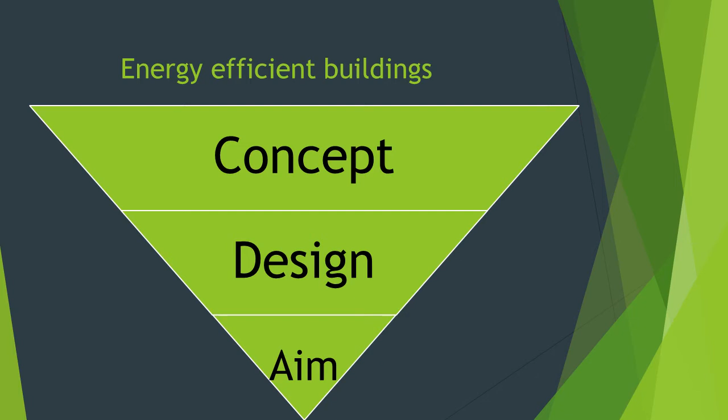So the objective of the energy efficient home has always been to promote energy efficient building design, to minimize the energy used, to come up with the design of a building, residential as well as non-residential, such that the building is able to manage its energy use on its own, depending upon the climate of the region and the solar radiation availability. It eventually becomes environmentally efficient and responsible towards the inhabitants as well as towards the external environment.

Now, understanding active solar and passive solar. There are two things which go into running an efficient energy home, and both work hand in hand. They run parallel in an energy efficient home. One is active solar. Active solar is simply when we install some module which converts the sun's energy into a usable form of energy, for example electricity, heat, cooling, etc.

Similarly, the other type of solar technology which we incorporate in an energy efficient home is passive solar. Passive solar is a very minuscule concept in the overall design or execution of the project, but the output we get from incorporating it is enormous, because the residential or non-residential house behaves smartly. We come up with a design which is smart in itself just by incorporating a small change, which we will take in the very next slide as we discuss passive solar for residential or non-residential houses.

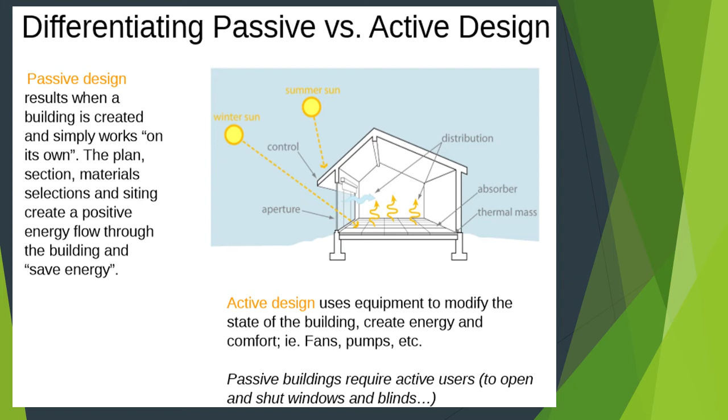So, before we learn about the solar passive design, we first understand the sun path chart, the trajectory of the sun or the behavior of the sun with respect to our planet. We are very much aware about the aphelion and the perihelion position of the Earth in its orbit with respect to the sun.

So we are very much aware about the winter solstice and the summer solstice. That we have shorter days in winter than in the summer, and longer nights in winter than in the summer also. So this thing is totally governed by the position of the planet in its orbit, and we are very much aware about the fact that we don't have constant duration of day and night hours throughout the year, and that goes on changing. Let me put it this way, the shortest day in winter and longest day in summer, which we often refer as December 21 or June 21, or winter solstice and summer solstice, respectively.

So, what does sun path chart give us an idea about? It gives us an idea about the amount of solar hours you are able to have in a particular day of the year. Second thing, one needs to understand the solar window, irrespective of the vegetative cover. If you are in an urban area, you have shades, you have adjacent buildings that may interfere in the solar window you will have. So for that reason, one may understand the amount of solar gain one has available.

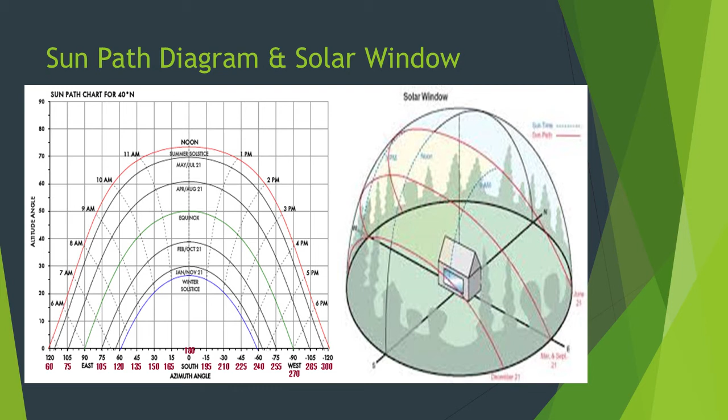Also, it helps us to understand that there are 2 days for which we have 12-hour duration day and night, which we often refer as equinox. These 2 days are March 21, the vernal equinox, and September 21, known as autumnal equinox. And why are we so peculiar about knowing these equinox days? Because these are the days when we manually determine the orientation of the south, because we are here in the northern region. So south is our solar gain direction, along which we are able to gain our solar radiations. So south is our vital direction, and for that reason we are able to determine the orientation manually. Also, it helps us to understand the amount of solar hours which we are able to have.

In addition to this, one more thing I'd like to put here is that a sun path chart also helps to understand the position of the sun. For example, we can see that the winter sun is at a relatively lower level than that of the summer sun, which also helps us to optimize the sunshade of a building on all the 4 directions of the building. And it also leads us to step ahead in terms of economizing the structure.

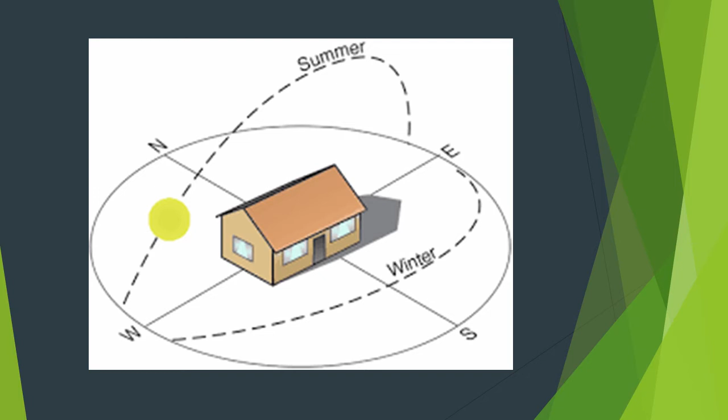Now, in this slide, we will be discussing solar passive design parameters, and we'll take all the design principles one by one. First thing which we'll have is shape. We are here in a temperate zone, and in this temperate region, the shape of a home is very important and plays a very important role in solar passive design. To determine a home's thermal performance, which is one of the important criteria we'll be talking about here, we prefer a roughly rectangular shape. Ideally it has to be cubical, but as we talk about the temperate zone, we want our homes to be roughly rectangular.

It should be elongated; the larger dimension should be along the east-west direction rather than along the north-south direction, because that is how we will be able to ensure better thermal efficiency of any structure, residential or non-residential.

By this thermal efficiency, we mean the finished floor area of the house to the sum of all its exterior surfaces, which gives us the floor area to surface area ratio. For any greenhouse structure, for any residential home structure, there should be a higher F to S ratio, which will ensure higher efficiency of the building.

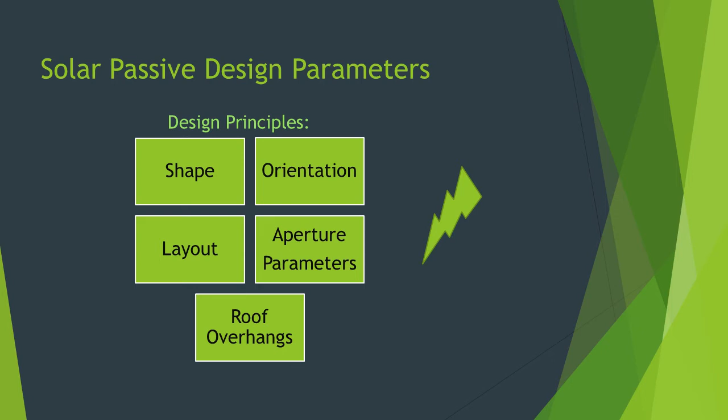The third criterion is layout. Layout is a very important criterion of the design principle of a solar passive house. By properly arranging the rooms internally, one can easily manage the heating or cooling that goes into the proper functioning of the house. For example, for any structure, we will put the sitting or living area along the south side for a person who lives in the northern hemisphere, above the equator.

So for that reason, we put the sitting or living area along the south direction, and we tend to have bathrooms along the west direction. Kitchens have a natural tendency to increase heat because cooking goes on there, and for an ethnic country like India, where we have lots of gatherings, the kitchen is a very important place. So we tend to put the kitchen along the north or northeast direction.

Breakfast corners often go along the east direction because of the morning sun, which is normally low on the horizon. So a proper internal arrangement of any structure helps us properly manage the internal heat.

By putting the living areas or the sitting areas along the south direction, we don't need much amount of energy to heat the area, as in winter the south facade will be able to trap the winter sun in, and will be able to heat the area on its own.

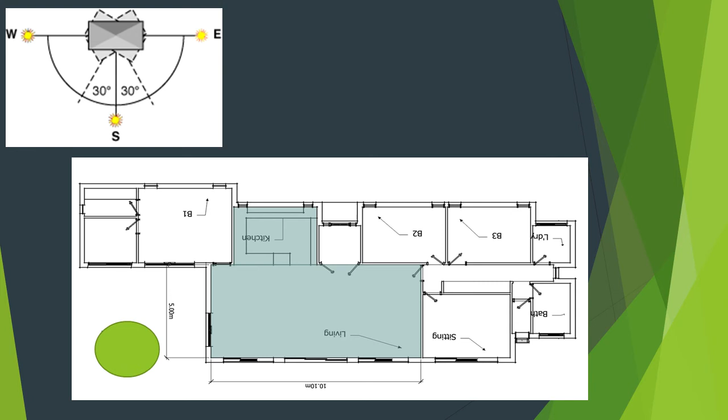So for that reason, we have taken care of the proper ventilation mechanism, or windows which will be in favor of having the infrared radiation during winter, but at the same time repelling it in summer. Also, we have visible transmittance. Visible transmittance value ranges from 0 to 1. For any energy efficient building, we want light and not infrared radiation, so our window should ensure a good amount of lighting and at the same time repel the infrared radiations. So this is the concept of high performance windows that goes into the solar passive design of residential or non-residential homes.

Now we have roof overhangs. Roof overhangs, awnings, sunshades, overhangs, call them whatever you want. The idea of roof overhangs in any solar passive design is to understand the position of the sun. The winter sun is going to be lower than the summer sun, and you will get an angle depending upon the position of the sun throughout the year, especially on the solstice days. So for that reason, you optimize the design of the sunshade, understanding the nature of the sun in the sky with respect to the amount of sunlight or infrared radiations or the visible light transmittance you need inside the building.

So numerous analyses are carried out in software that helps to support and design the solar passive house. We understand the position of the sun in the sky, and based on that an angle is devised. We go on and optimize the sunshade, the offset of the sunshade, the amount of overhang that is to be provided over the window, on all the sides. For example, this analysis is to be carried out for north, south, east, west, all four directions. Optimizing the sunshade helps us to economize our building, because we understand that you may or may not need the same overhang along all the sides of the building.

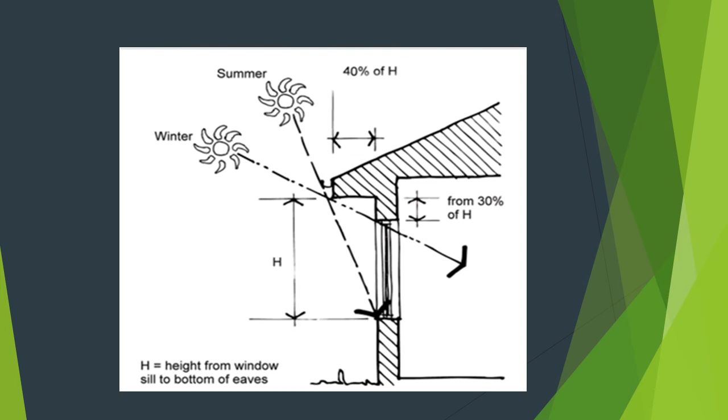Yes, you can use a sunshade to protect the windows from splashes of rain, but that is one thing. Another thing which we are trying to understand here is the amount of solar radiation you need inside the building and what you need to keep away from the building. So by optimizing the sunshade, we are able to maximize or minimize, and a range of solar intensity which we need inside the building is to be understood.

Before we go and understand the simulations, which I said that we optimize sunshade, we check for the layout. We have sunroom in the solar passive design, which is the governor of the heating and cooling inside the building. We have ventilations, we have sunshades, we have awnings, we have thermal mass. So many analyses go into the design of a solar passive design.

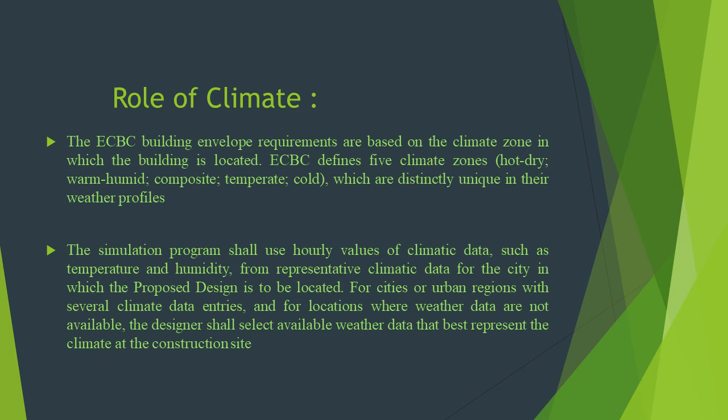But here, what are the two key factors that go into the software which act as a guide in the simulation process? The two things are, first, the coordinates of the Bay Area, and second thing is the climate data. First thing is the coordinate. Your Bay Area's position on the globe or on the planet is very important, because that is how you understand the position of the sun, your longest day, your shortest day, your hottest day, your highest rainfall day. And this is how you understand the climate.

When you put the climate thing in this figure, the role of the climate is very important in all the simulation mechanism, because we are regulating the cooling and heating inside the building based on the climate, or the sun availability, or the cloud cover, or the snowfall, or the rain that is available to you in that very particular area. That is the climate of the area.

So in order to carry out the simulations, we go on and collect the data of the climate for that very particular bay area. So there's a very macro classification that has been done. For the macro classification, what data you are in need of is sunshine data, rainfall, solar intensity, radiation, temperature, humidity, cloud cover, or even sometimes snowfall data. This data is not in the same form as you need in the software. So the crude data needs to be properly scrutinized and reframed, so as to put it in the software in a usable form.

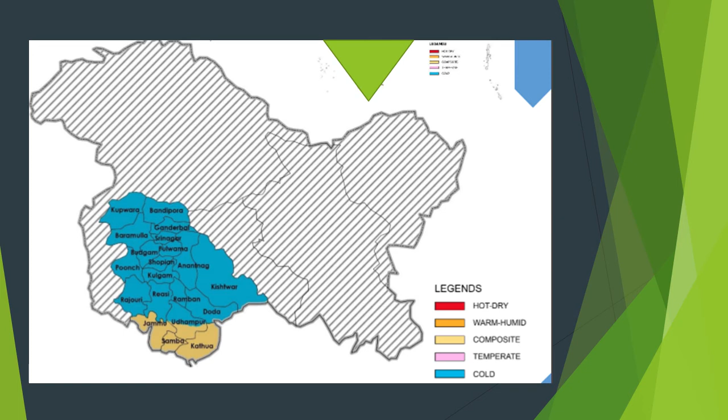Analysis. So various analyses and simulations help us to arrive at a figure which gives believable shape to the hypothesis which we have been making so far. So the first analysis which we will be discussing will be shading analysis. In shading analysis, for a design of house or a structure, we analyze the display of shadows hourly, daily, giving an idea about the awning size. These displays of the shadows are known as butterfly diagrams. They help us to design the dimensions of the shading devices, which is optimized automatically.

The data on which this settles is hourly shade data, day-wise shade data, or sun's position in the sky, based on which we come up with the optimized dimension of the sunshade along every direction. North has its different awning design, so is east, west, and south.

So, second analysis which we will be discussing will be space load analysis. A building system can work on grid as well as off grid and passively regulate the energy on its own. But to check the load of the building structure gives us an idea about the sustainability or the efficiency of that very structure. So monthly space load graphs are to be generated to understand the load on appliances for heating and cooling of the space inside the premises, while making an account for passive solar, and active solar should be also incorporated into the building structure.

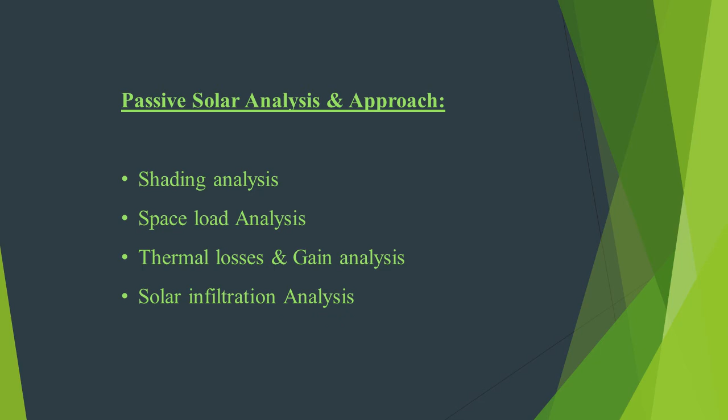So in this solar infiltration analysis, we make a proper check on the amount of solar radiation that comes into the sunroom. Proper analysis is done by which we understand how much solar radiation comes into the system, which is responsible for heating the system, as well as how much solar radiation we are able to repel from the system by providing proper cover over the skylights, by providing proper ventilation, by covering the facades. So with this, we are able to understand the working and functioning of the sunroom in any solar passive design.

So now we have ECBC, the Energy Conservation Building Code. The Energy Conservation Building Code is formed as a result of the Energy Conservation Act in 2001. The purpose of this code is to provide proper guidelines for any design, to provide a proper track to follow for any consumer, any dealer, anyone who wants to invest in solar passive design or encourage such type of construction. These are not just guidelines for design, aperture, layout, or orientation; they form a far wider pedestal than one can think of.

You get an idea about the compliance documents and forms, what you need to put into the system, what you need not put in, what is mandatory, and what is not required or least required. So you actually draw a boundary line for any passive solar design. Also, one needs to get an idea about the simulation requirements and calculations, how much aperture size is required, how much floor area is required, what type of material is best suited for the floor area, what goes best in the windows, the roof, and the walls.

So all these things are properly guidelines that have been put into this ECBC code. They also give us the idea about the softwares that help us to carry out the simulations. The software is one tool which helps you to understand the results, to get the results of any structure, and how efficient the results you will be able to have before its actual construction and execution. It also gives us an understanding of the electrical and renewable energy system.

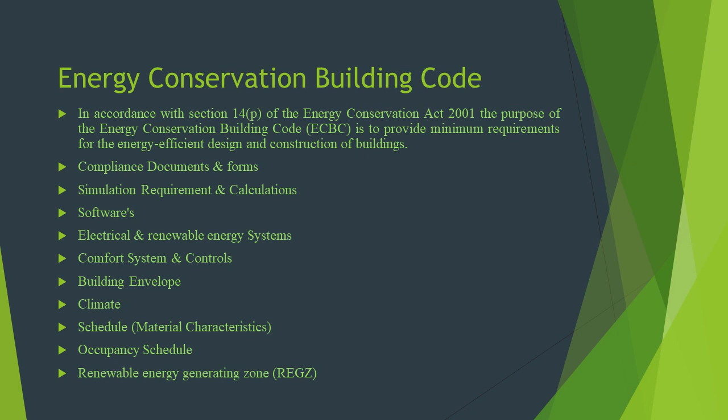Embodied energy is something which we will attribute here to material efficiency. This is very important because in any energy efficient design, building design or zero energy building design, one always aims to cut down on the carbon footprint. So for all the materials that go into any structure, the cradle to grave journey of any element of that house or structure should be minimum, if not zero. If we are not able to pull that energy consumption to zero, it should be as minimum as possible.

For example, the manufacturing of the brick, right from extraction to processing to transportation to manufacturing, then again transportation to the construction site, then the execution or installation, then maintenance and operation, and finally the disintegration of the material back into nature. This entire journey of any element of an energy efficient building structure should involve zero energy or at least minimum energy.

So we understand that extraction of raw materials, transportation of material, manufacturing or processing of materials, usage and at the same time disposal of the material, this entire journey should ensure that the least amount of carbon footprint is involved.

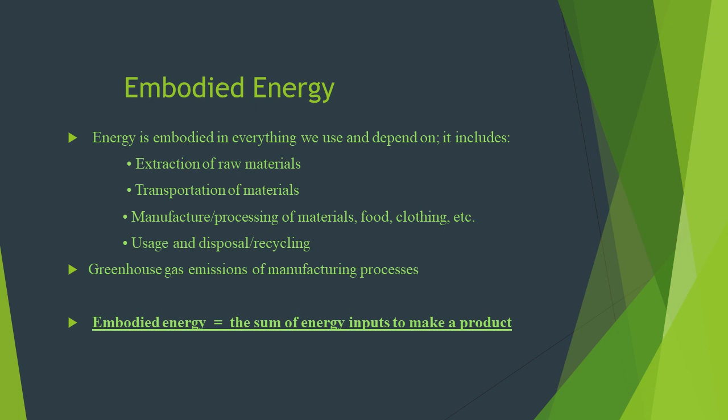We also need to understand other parameters that any energy efficient building should mandatorily incorporate. First is water efficiency. Water is not only to be used, it should be efficiently used, recycled and reused. We should have wastewater management, since we have sullage and we have sewage. Sewage you can put into the STPs, or you can treat it at source. For hotels, hospitals and restaurants, it's mandatory that source treatment is there before letting it into the STP. But we also need to properly manage our sullage.

For example, sullage water can be partly treated and used in kitchen gardens, or after being partly treated, used in faucets or flushing. At the same time, water efficiency also includes smart faucets. We have smart taps, sensor based taps, which help us control the amount of water that goes into the sinks, flushes or wash basins. We also control water usage by providing low head, and we control potable water availability. By this, we are able to control the use of water and not waste it.

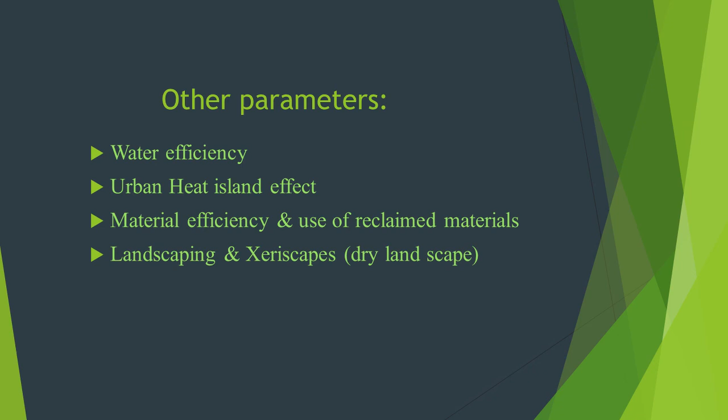Here we will be discussing GRIHA rating or energy rating. There are organizations who acknowledge and consider the efforts made in support of this cause of energy efficiency and zero energy buildings. So GRIHA is an organization which not only supports energy efficient construction in terms of the monetary support, technological support and guidelines it provides, but it also helps you to rate a building.

By the energy star rating, you're able to go a step ahead in this direction. Not only does it boost your morale, but it encourages you to go steps further ahead in this direction. So GRIHA assesses a building on 34 criteria and awards points on a scale of 100. So many criteria go into it. If you come up with an innovative technique, innovative design, or innovative method of execution of any energy efficient house, it will give you a star for that. There's pointing for that, there's a rating for that.

Similarly, so many aspects: the type of windows you put into the building, the structure you erect, any type of material that is reclaimed, and what use you have made of it in the new structure. So you get rated based on these things. The rating may also involve occupancy sensors, water faucet sensors, tap sensors, and lighting sensors. These help us to make any building very efficient, and very smart structures have been made by taking care of such criteria.